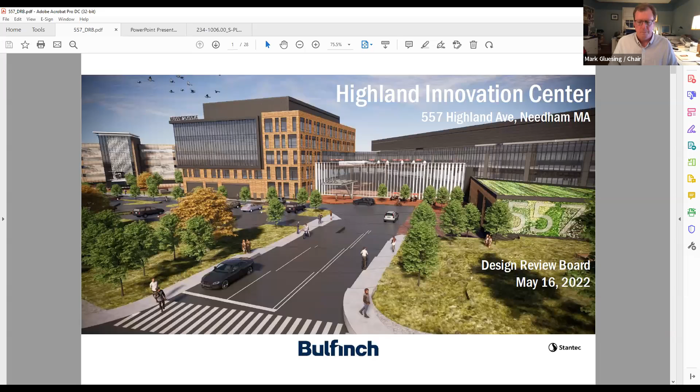Can everybody see the screen okay? Yes. Thank you, Mr. Chairman, members of the Design Review Board. My name is Robert Schlager, I'm the president of the Bulfinch Companies, the owner developer of the property. We're here this evening to present our proposal to you.

Some of you may have seen it previously in various neighborhood group meetings, both public and private. Please feel free to visit our website, 557highland.com. There's also some FAQs, frequently asked questions, and we'd be happy to go through any one question with you if you have specific concerns.

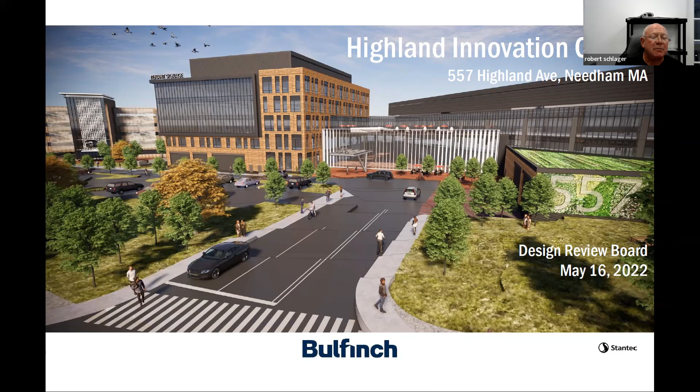With us this evening is our landscape architect, Paul Finger and Associates. He and Eric Joseph will describe for you the landscape features of the site. Our architectural team, headed by Principal Eric Weyant, Kristen Weigel, and Tom Ertz, will go through the architecture of the site. We're very pleased and proud to present this to the town of Needham.

The project itself is really an award-winning project in our view, and it's something that our company, which has been in existence since 1936, will probably place in the top 3 of its most interesting developments, both architecturally and design-wise. The project team together, collectively, has nearly 1,000 years of experience.

Stantec, the former ADD Inc., designed the office building at 160 Gould Street, as well as our headquarters building at 250 First Avenue, also in Needham. VHB, traffic consultants, SGH, structural engineers, and local counselors Bob Smart, Tim Sullivan, and Charles LeRae. Next slide, please.

So, overview of the site as it exists today. I think everybody's been by it probably 100 times, so I'm not going to waste time refreshing everyone's memory. I just want to point out that the Channel 5 site, in the lower right-hand corner, is not owned or operated by us. That has nothing to do with our project; it's owned and operated by Channel 5, also known as Hearst Media Publications.

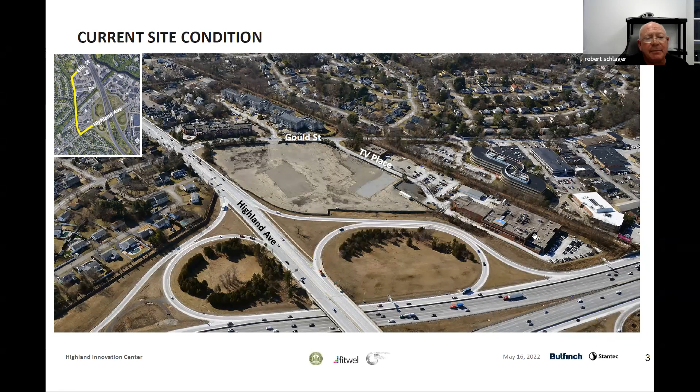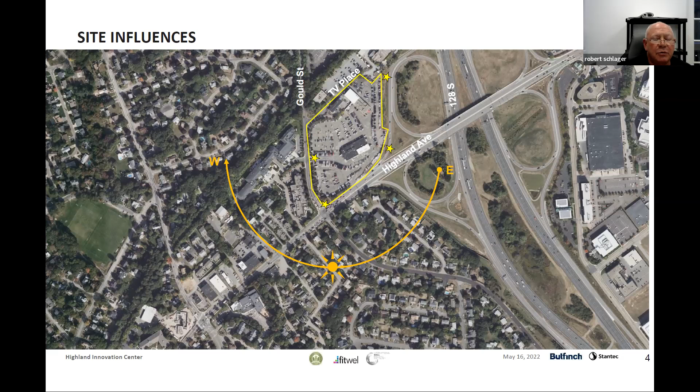Hi everyone, my name is Eric Weyant, design principal at Stantec.

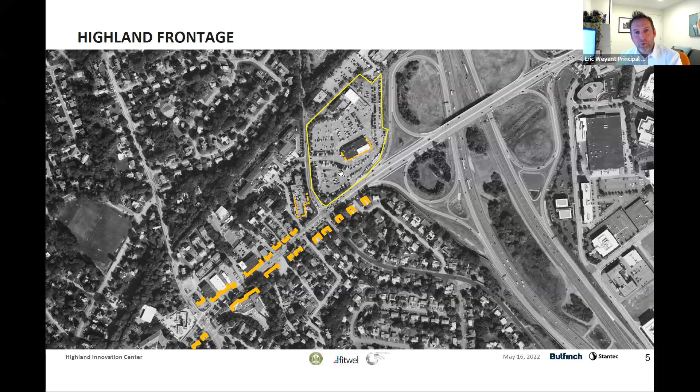There's a number of influences that have shaped our approach to this project. Obviously the site influences slide previously that you saw on the orientation of the sun, movement around the site. We also looked very closely at the frontages along Highland and how the current Muzi lot is really not contributing in any real meaningful way to the public realm. So that was something important to us as we began the project.

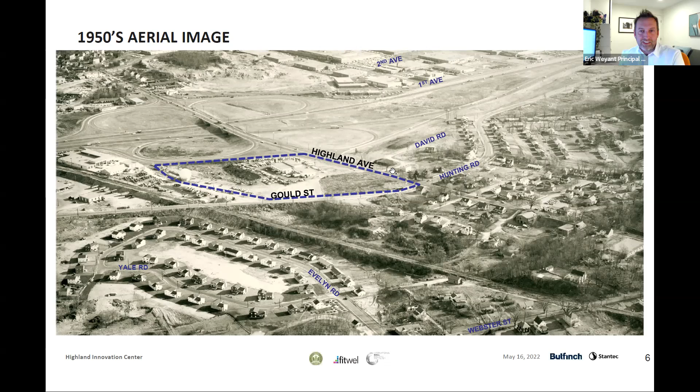We also looked back at some historical photos to understand the evolution of the site. When Muzi moved to the site, it was kind of an internal building with all of the cars located around the perimeter. As Robert mentioned before, their primary access point was actually off of Highland Ave and then through Gould Street. There was no opportunity to do anything at the corner. So we really looked back at this history and think there's a great opportunity to improve the site's condition.

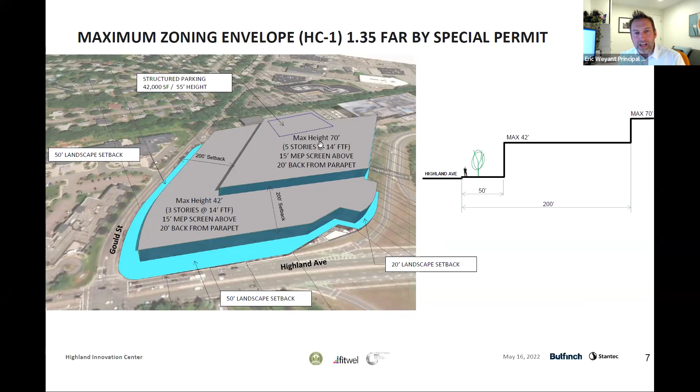The 50-foot landscape buffer coupled with a 42-foot high street wall is a very comfortable, kind of one-to-one relationship to walk alongside. So I think this will be pretty reasonable to work within. The structured garage was also dictated to be within this 70-foot height zone, although its height was capped at 55 feet, and it also had a maximum floor plate of 42,000 square feet.

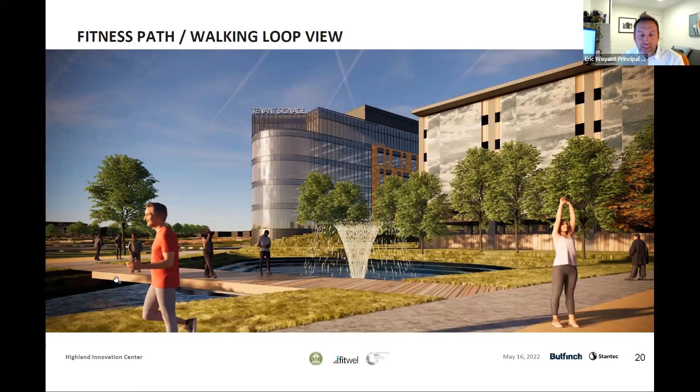This is one more eye-level view on the fitness trail, looking back at the building and seeing the structured parking off to the right in the foreground.

You can see the idea for these banners, at least at their locations. We'll still refine what is actually on them, looking at Needham influences and trying to tie it to the neighborhood and the town.

One thing I should mention: we got very excited doing these renderings, and everywhere it says tenant signage, this should not be viewed as part of this proposal. We'll come back with a full tenant signage proposal. We didn't fully account for maximum size and locations, and I know parapet signs like this aren't allowed, so we'll revise the signage when we come back.

We also just finished a physical model this weekend, so I wanted to include a couple of these slides. I know this wasn't part of the preview set I sent to the town last week, but again, just to see the project in context.

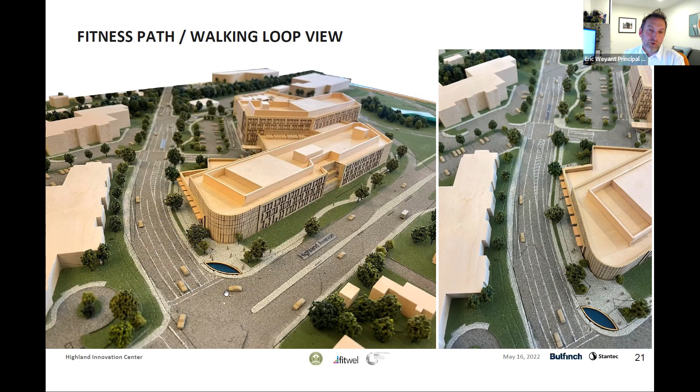I know it's not part of the architectural design, but there are a number of really impactful traffic upgrades to Gould Street—bike lanes, road widening, and additional turn lanes—that we think will really improve and enhance this edge of Gould as you make your way to Highland.

One more view in context, floating over Wingate and then over the detention pond with the banners again. That curved glass corner repeats on the 128 side as an opposite motif to what happens at the Highland and Gould corner, which steps back at level 4 so that level 5 can have an outdoor roof deck for the tenant at that location.

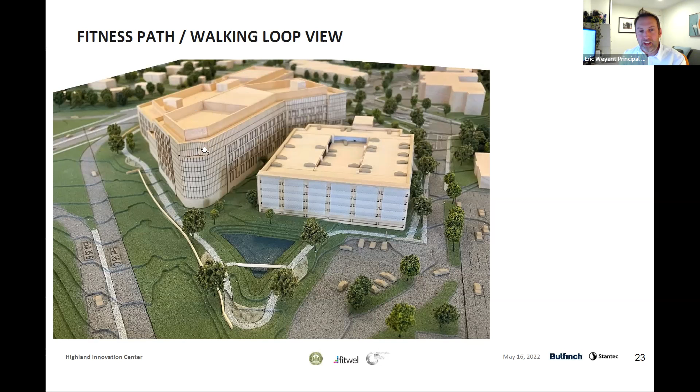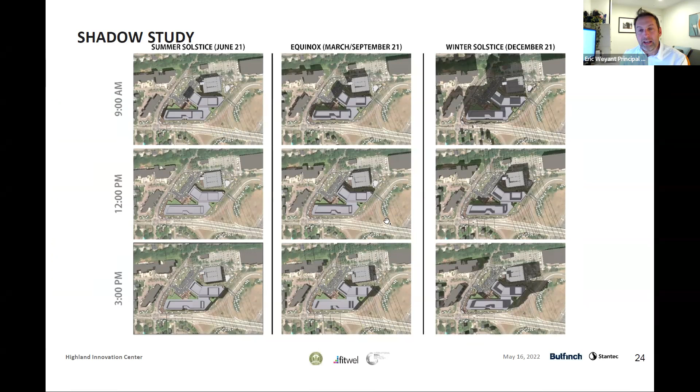On shadow impact, we don't need to go into great detail, mainly because there's almost zero impact to any surrounding properties. Any shadow falls primarily on our own property or our own buildings.

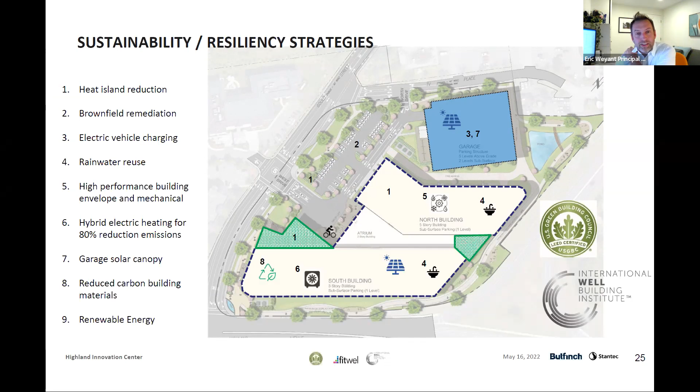On sustainability—again not necessarily part of the visual components we're reviewing tonight—we have a very elaborate and extensive approach to both sustainability and wellness, with a number of fantastic features that will make the building perform well architecturally and also benefit tenant occupancy, like healthy eating, opening up stairways to promote exercise, bike storage, and more. We're also proceeding with a LEED Gold approach and are currently on pace for that.

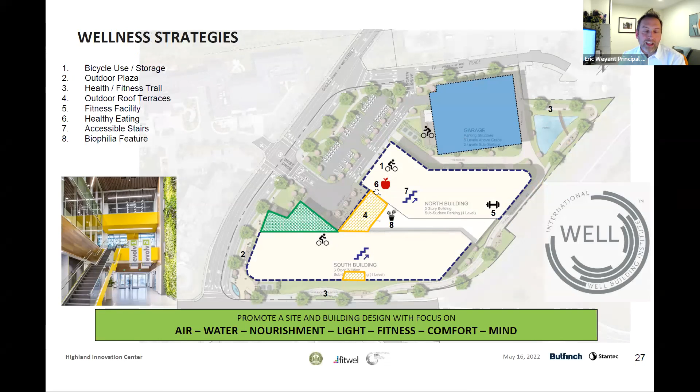These are some of the wellness attributes: biophilia within the interior atrium space and green walls. Lots of really cool features we're proud of and think the town will be proud of as well.

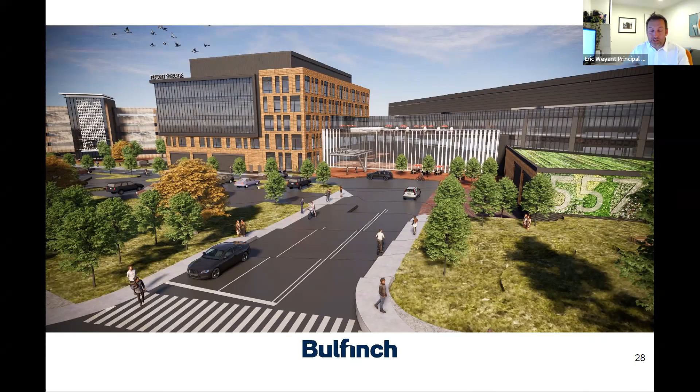Eric reviewed most of what we were going to go over, but let me elaborate on a few items. This is a unique site—Muzi, as you're all well aware, was paved from end to end, basically void of any vegetation. Usually as a landscape architect you look at existing conditions and see how to enhance them, but in this case we're starting from a blank canvas and working from that basis.

What we really started to look at are four or five activity areas we're going to concentrate on. As Eric described, one is more of the commercial retail area, where we're anticipating hardscape with pavers, tables, and an area for gathering, dining, and sitting.

And it's not only for tenant-driven purposes, but really for the community also. On the corner, the only historic element was the little fountain, which, as Eric mentioned, was the koi pond. So to look back at what Muzi had in that area, we're going to replicate that in some form of fountain, maybe something with a waterfall aspect, with a plaza behind it.

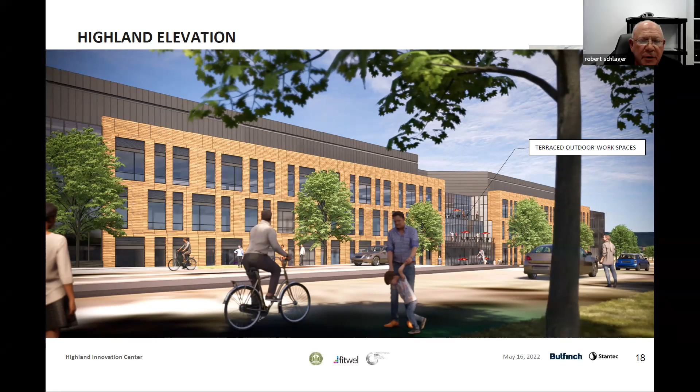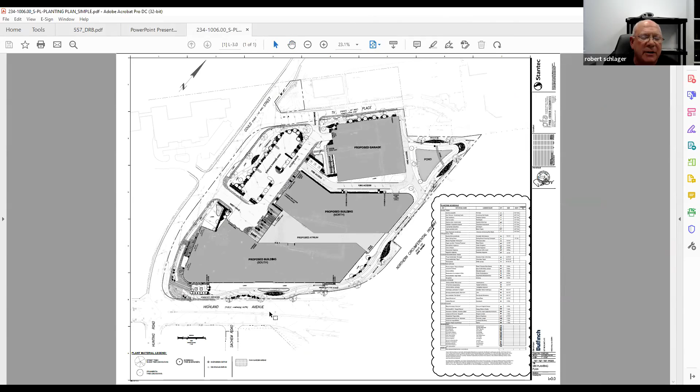Yes. So Eric, can you go to the vertical elevation of Highland? I also have Paul's landscape plan, that sketch up. Can you put that up, Eric? Can we go back to the aerial perspective, it'll just be easier. Oh, you just had it. Okay, we can use the black and white. Can we zoom in a little bit so Mark can see the trees?

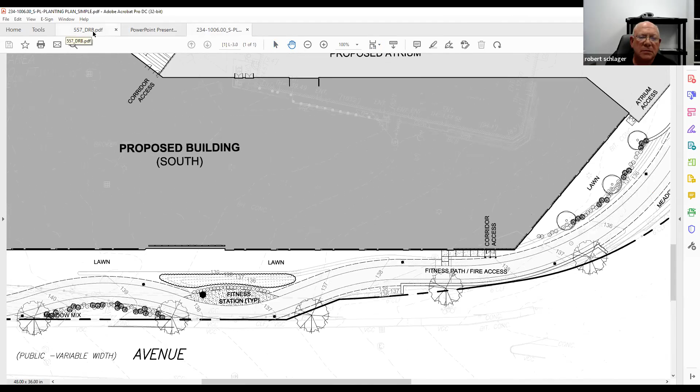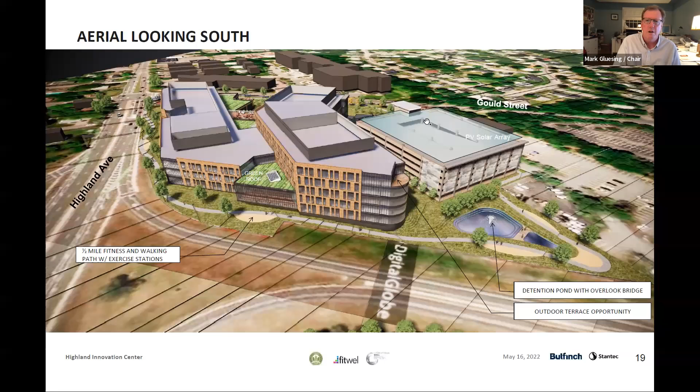Okay, I think what we'll go through tonight is just the general layout, but that's when the meadow mix and more determination of where those kinds of things are happening comes in. Maybe we'd like to have you come back for a quick review of the final ultimate landscaping and the issues there. Tonight we'll talk about the general site layout, the amenities Paul talked through, and the general orientation, and see if there are any comments from the board. Then on the detail side, when you've decided which trees are going where, we can go through it with you at another time, if that would be okay with you. That's fine.

For example, one comment made was that we obviously want the walkway surface to meet the requirements of the fire department, the police department, and sustainability issues to comply with our LEED certification. We would want that to be pervious material. Some people suggested a dirt path to make it more nature oriented. Others suggested a gravel path. From our perspective, we're happy to do a stone dust path that has the capability and capacity to withstand the weight of an H20 loaded fire truck, which the fire department has asked for. So we're really looking for input from all groups, including the design review board, as to what you folks might like to see as being more consistent with your expectations.

Similarly, on some of the trees, we've spoken with the tree warden, met with him a couple of times for the town, and he suggested alternating species along the street curb line, so that if there's a disease similar to what there was with Dutch elms 20 years ago, or other types of species issues like gypsy moth, we'd have that protection. However, some of the neighborhood groups have suggested a more consistent species would be to their liking. So we are... Sounds like you have your hands full getting through them. We do, we do. But the good news is that it's limited so far, at least, to two issues: landscape selections and traffic.

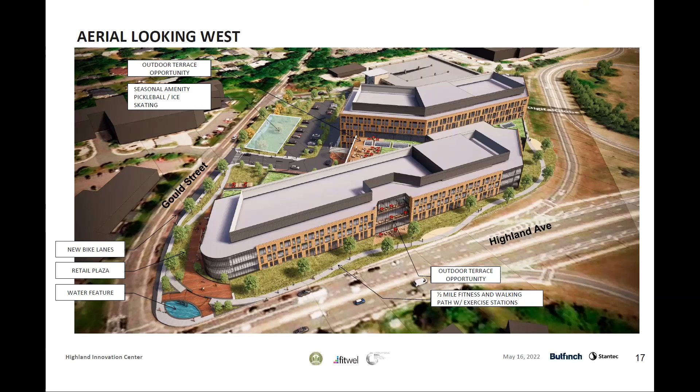Natives, I'm hoping you guys use natives in your landscaping plan. Yep. I think that's all. I thought the project was really exciting, and I really enjoyed looking at it, so I appreciate all the effort you guys have put into it.

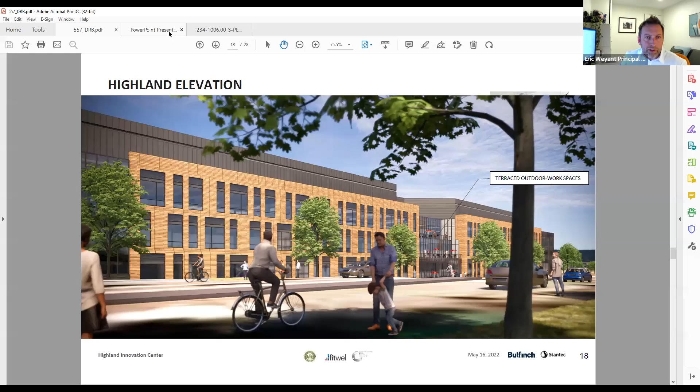Thank you. Eric, could you switch over to the slide on the plant species and blow that up for the DRB to see the selections we've got to date? There you go, go to the far right of that plan. Oh, the other side, there you go. Perfect, can we zoom in a little bit? Paul, do you want to run through, or Eric, whoever's most versatile, just run through the species?

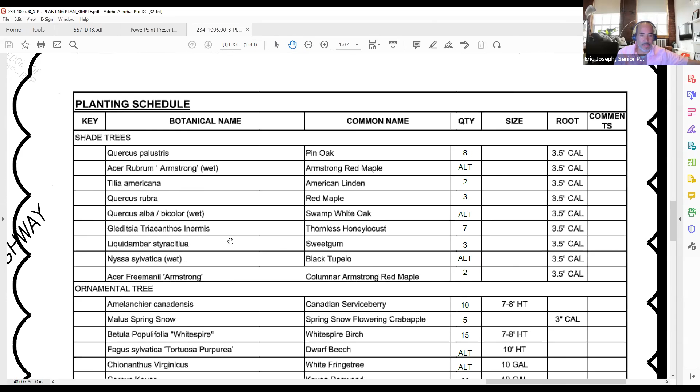Sure. So we have a variety of different plant groups - shade trees, ornamental trees, evergreen, and deciduous shrubs. For shade trees, we have pin oaks, which in talking with Mr. Olson from the town, he happened to like. We're also looking at lindens, oaks, and honey locust.

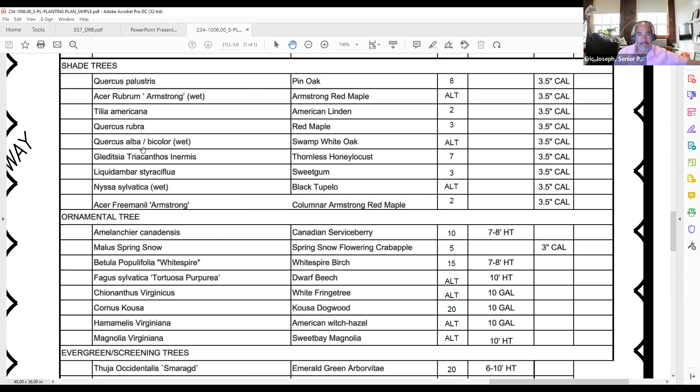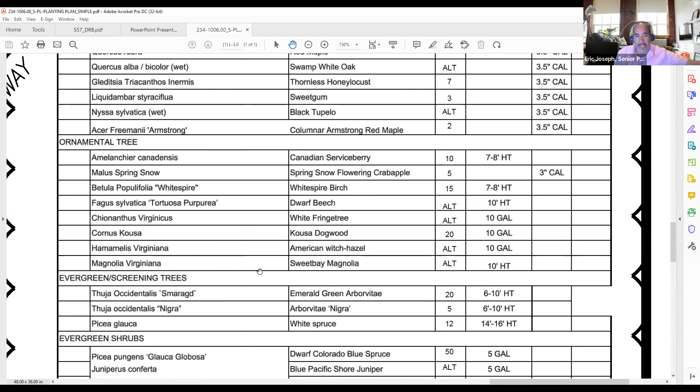For the ornamental trees, you mentioned wanting something a little more native, so we're looking at service berries. We also have some more ornamentals in terms of dogwoods and sweet bay magnolias. So it's a variety of different types of ornamental trees, both native as well as more ornamental.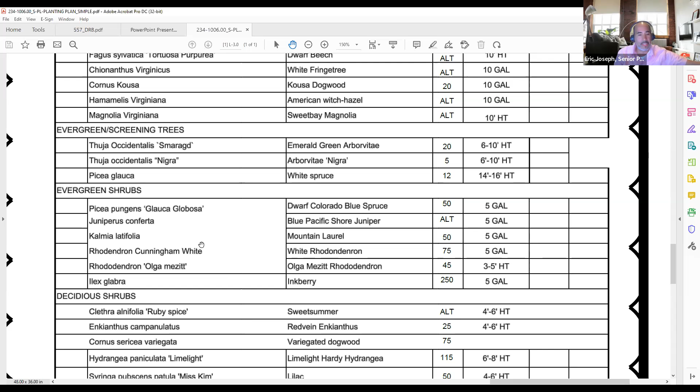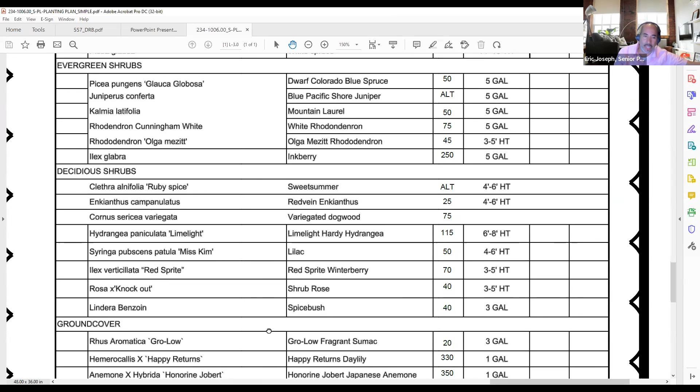Some screening trees, we're looking at tall spruces and arborvitaes, just for some screening and site elements. For shrubs, we're looking at rhododendrons, inkberries, junipers, even some dwarf Colorado blue spruce. For the deciduous shrubs, we've got a variety here - sweet summer, Enkianthus, variegated dogwood, hydrangeas, lilacs, roses, spice bushes - a lot of things that attract wildlife, butterflies, and birds.

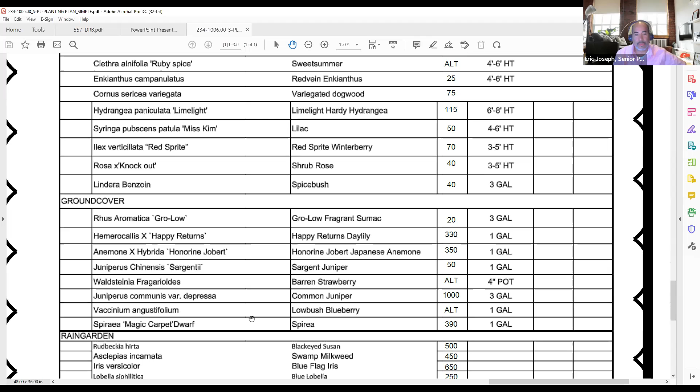Ground cover, we have sumac, daylilies - that's probably going to be one of our chief grasses. We do have some reed grasses we're investigating, some strawberries, low bush blueberry, some spirea. In terms of another plant community we're introducing to the site, we have rain gardens with black-eyed Susans, blue flag iris, broom sedge, cinnamon fern, and asters. We're getting into too much detail. So it's obviously a wide variety of different types of plant material.

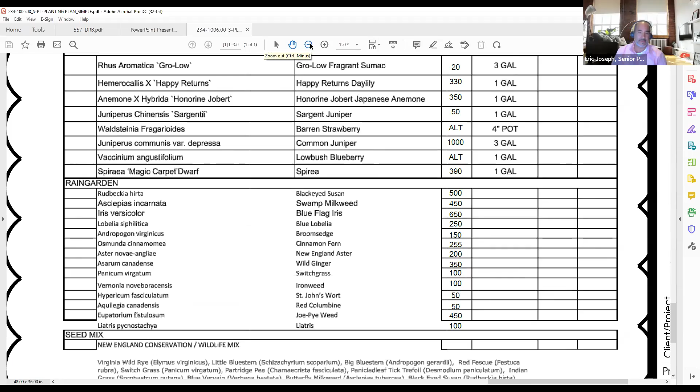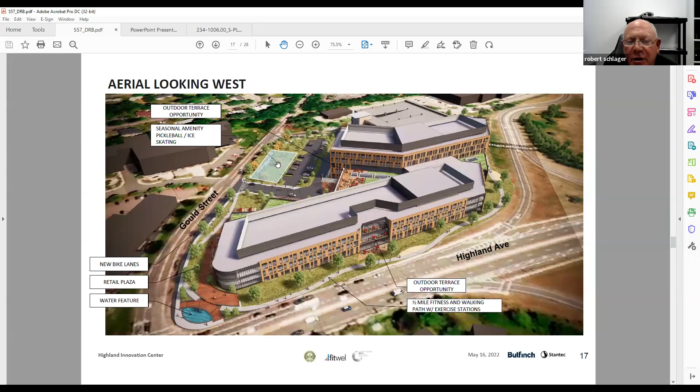One of the things we tried to do is structure it so there was spring, autumn, winter, summer flowering shrubs or colors that would be appealing and soothing, especially along the jogging trail. And Susan, that's a very good comment along Highland Avenue. We will incorporate some type of mid-height, 18 inches to 3 feet, shrub there. Just not sure what type would be best suited for that along the trail, or how we orient it. I don't think we want to go with material too high that would dwarf the trees, which will ultimately become very mature over the years. But that's a good suggestion to make people feel more protected.

The police department was sensitive to visibility, and that's why we kept it visible and open. The site is open to the public to walk or take advantage of the jogging trail or walking trail all hours of the night. There are 911 call boxes, and it is fully illuminated 24/7.

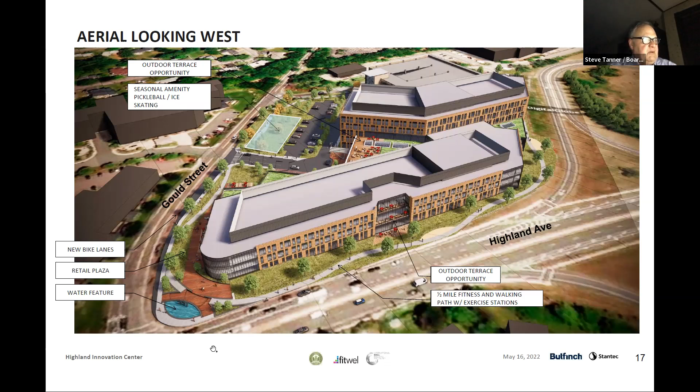Okay, thank you. Steve, do you have any questions or comments? Yes, I agree with Susan about the Highland Ave elevation, and I think that's a very good point. As far as anything else, I think this is a preliminary review, and I would need to see more details. One thing I'd like to see is an actual material sample of the building materials - like a palette of the screen wall, the charcoal gray screen, the concrete panel, or whatever it is, the exterior material palette. Yeah, no problem, happy to.

We can follow up with that. Should we send the box of samples to you, Elisa? Well, maybe you should send them to Mark, and I could meet with Mark. Yeah, we'll coordinate after the meeting, but it's likely that as you come back, this is our review for the planning board.

So this is our official review, not preliminary. So we would like to see that material sample. I don't think it's something we would disapprove of, but a better understanding would be helpful. If you're coming back for the landscaping, maybe we can coordinate the two together. I'll coordinate with Elisa, and we'll get samples in so we have them on file. We'll send them out tomorrow or Wednesday, have them delivered to Elisa, and she can pass them around to each member of the committee or people can stop by the office to look at them.

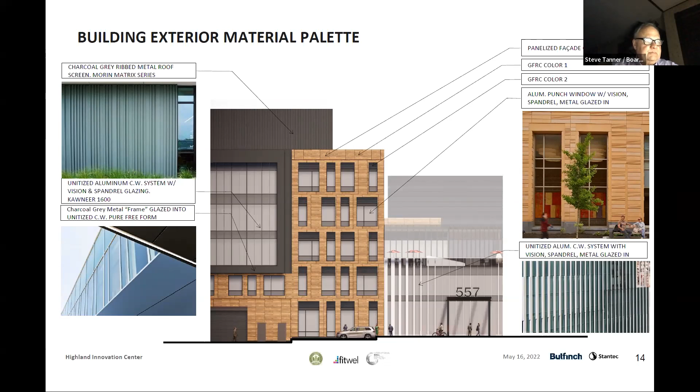Okay Steve, any other thoughts? No, that's it, thank you. Bob, I don't know what you're able to see from your car, but I got my laptop open. I'm good, I'm following along. Hi everybody, and a special hi to Eric and Kristen. Nice to see you. Likewise.

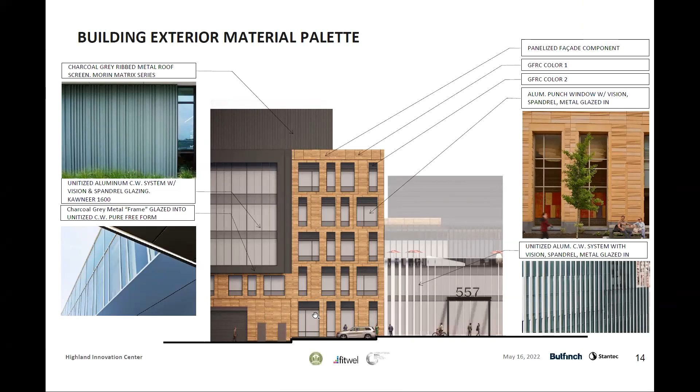Piggybacking on some of the landscaping comments, I'd love to see some grasses different than lawn grass. There may be opportunities based on how we think the different areas currently shown as green lawn surfaces. So maybe on Highland, between the walking path and the building, it might not be a popular gathering place, so maybe some different type of grasses there.

The illumination, is that part of this review? I heard the path would be illuminated, which is good, but it brings up a concern of how those look, and how illumination at night affects neighbors. Sure, so that's a question about what those light standards might look like. We actually have the lighting as well as photometrics. They're all dark sky, if that's your question. They do not have any off-spray light like the olden days. They're all LED downlights, and we can submit that with the package of samples, which we're happy to do.

Thank you. And also the illumination, I guess specifically more in the parking structure at the back, the north end of the lot. I've been on the board a while, and we've been through several projects in Needham Crossing, and there's a large garage there. When I drive south on Route 128 coming over the hill from Newton into Needham, I can see those lights from a long distance in the garage. I know there's a screen on the proposed garage here, but I'm curious about the extent of the screening on the garage.

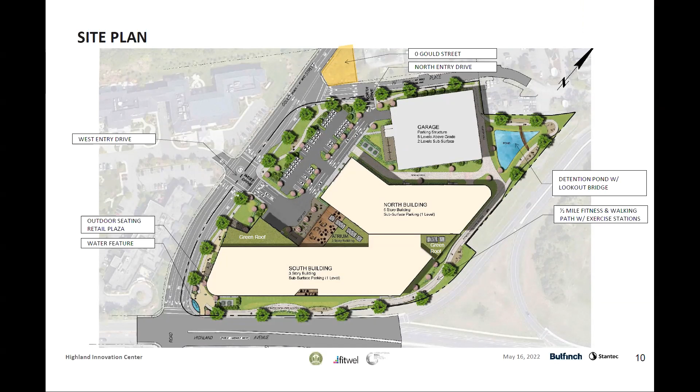Is there any potential for glare and reflection, those kinds of things? Good question. And then the screening on the roof, it's set back appropriately, but maybe consider a somewhat lighter color than rendered here, just because as you look up, you typically look up to a sky that might be in your view, and the sky tends to be a lot lighter. Agreed. And it seems to be rendered a little darker than the stone, the GFRC on the facade so far. And lastly, thank you to all on the team, a very thorough presentation. Thank you, that's it, Mark.

Thanks, okay. I guess, well, my comments would be a couple of things.

When you're talking about knitting front to back through that atrium space, that's all indoor, correct? That's an indoor atrium. Is it a single story? Double story, 2-story, okay.

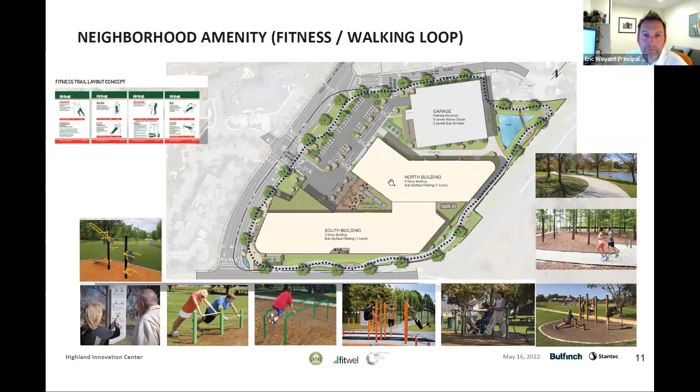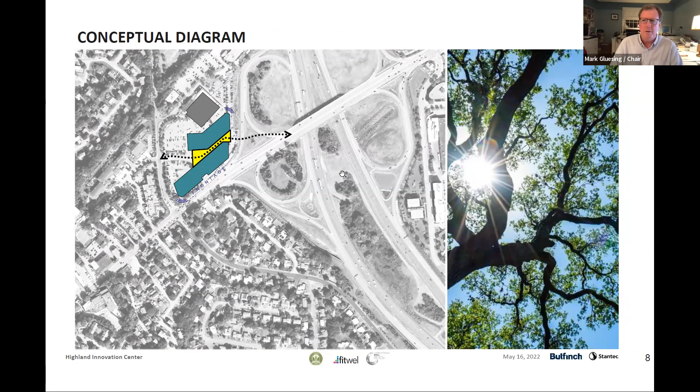So I understand the GFRC material that you're using. Have you finalized the choices on any sort of textures or colors, or is it approximately rendered the way it's going to be? It's rendered in an approximate way, I would call this the basis of design. Typically when we work with a precast or GFRC manufacturer, we will continue to refine, try different sandblasting - like oh that looks a little too heavy, that's a little too light - and fine tune the detail as we make our way through DD and CDs.

I thought the site works well. Again, you're hearing the same comment - we'd rather see a little more variety in the planting schemes, even in the larger lawn areas. However you might do that. I know this is early and you're negotiating a lot of other things, so we'll leave you to develop that as you see fit. But our comment is clearly that we don't expect to see just a bunch of mowing lawns. It doesn't seem to meet the sustainability issues that you've been talking about.

So we hope you, as you develop that, can take that into consideration. I do like the outdoor seating area. My concern when that zoning went into effect was that there was a big setback on Gould Street, and while there was a lot of discussion of pedestrian activity and access, it wasn't really street friendly - it was, you know, the 50 feet. So I'm pleased to see you developing that as something different than just landscape space, that it can be an amenity.

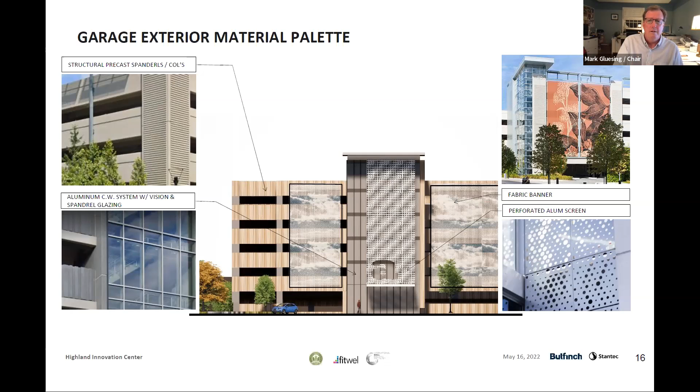I'd also like to see a little more of it, especially on the Gould Street side, where there's a fair amount of panel left exposed as concrete - just the corner, and then that far side. That's going to be quite visible to locals traveling on Gould Street. Maybe focus up on the front and the corner as it turns, similar to what was done on 128 - pretty extensively done, rounding the corner. I just don't want it to look like we hung banners on top of a concrete block - there should be another layer of intentional thought to it. Good comment.

So that would be my comments at this time. Chad Riley was able to join us late - I don't know how much he saw, but he has the package. Did you have anything you wanted to add?

You're muted, Chad. Apologies for everybody that wasn't able to join promptly. I think I echo the comments I've heard from my colleagues.

On the outdoor seating area, it's a pretty heavily trafficked, idling area, so having some kind of decent screening from the cars would make it a more pleasant area. I'm not sure exactly how the traffic works or if it was addressed, but I wonder if that one intersection closer to the Highland Ave intersection is going to create some backup if cars are coming out there as well.

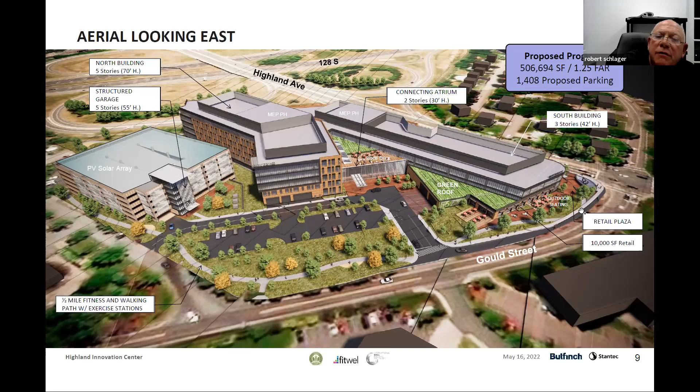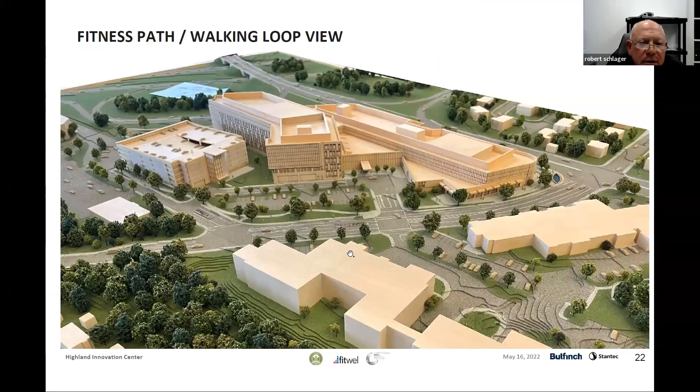If it hasn't been studied, it might be worth looking at whether that might be an entrance only. Can you flick to the traffic plan, the model that shows the plan? Just so that Chad can see it. It just seems like if everybody's trying to go in and out right at that first intersection, it could cause a lot of backup.

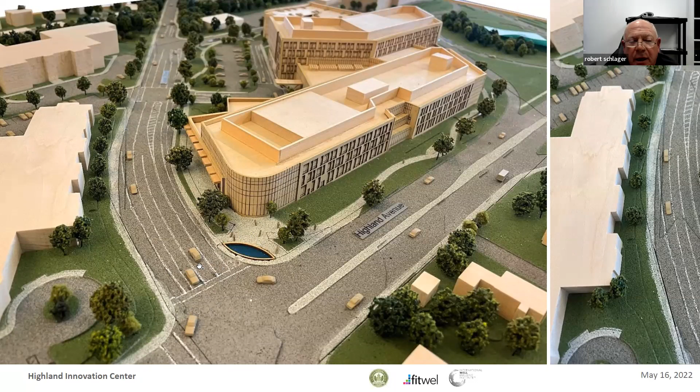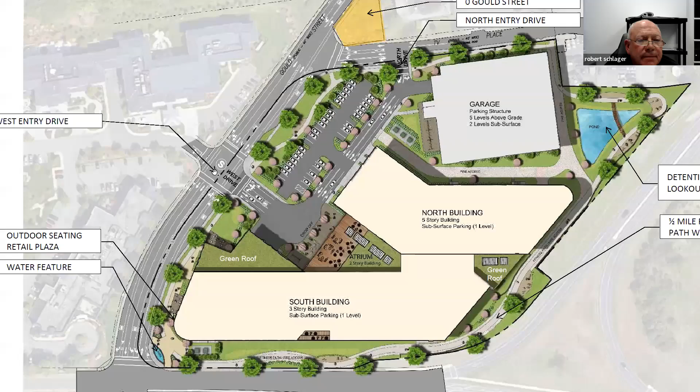There's a left only, a through lane, and a right only - or might be a through and a right, then two through-and-rights and one dedicated left. And then bike lanes as well on either side. I'm more thinking about if cars are trying to come out of that, and I guess there'll be a traffic light there. Go to the next model image, which shows the signalization. Right there - yep, the new West Drive will be a new traffic light intersection with the Wingate property.

I'm sure it's been modeled, it's just - I don't know. Just when I was looking at it, I wondered if the whole thing might be one-way traffic, but I'm sure you modeled it.

Just going back to the overall site and picking up on some of the things Mark was talking about with the garage - that backside of the garage, on towards the north, is going to be very apparent from the highway. Although that's obviously a different scale than looking at it from the neighborhood, it's going to be very apparent. So some real thought is needed to the image that's projecting out as people are approaching in the southbound direction.

But overall, it seemed like a decent composition to me architecturally. There was a lot of thought. The south building is a pretty long facade, but it's just basically traffic along there.

Picking up again on the garage, one of the things we've run into a lot is the way the lighting works, especially looking up into the upper floors, that there be some light control. Maybe it's not as much a concern from the highway, but with the residential area across the street, making sure people aren't looking up into glaring lights, I don't know if it's 24/7 or late into the night. But some shielding of the lighting and some consideration of that would be worthwhile.

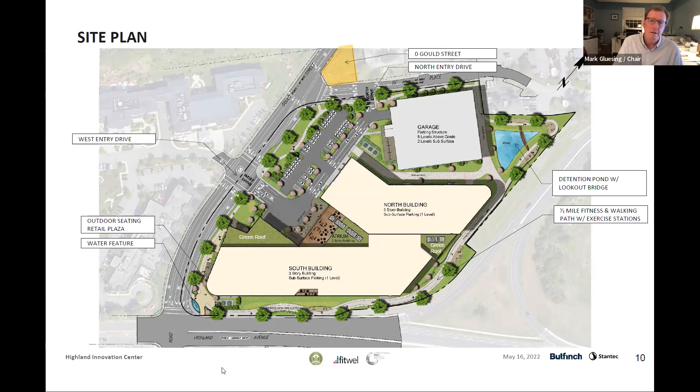So thank you for the presentation, and thanks for the building. I think it'll be a nice addition.

Thank you. Would you like to meet prior to our planning board hearing on June 7th, or would you want to wait until after that hearing and then come back to us? Our memo will say we're going to look at it in more detail, and there are a lot of issues you'll be covering with them. So if you want to try and accomplish it before June 7th, I don't think we meet again. If you want to wait till the next meeting, make sure you have time to get through your coordination with the neighborhood, and maybe you can even get some planning board input based on our comments, then come back after that. So the timing's up to you, we'll do whatever you want, but I don't feel the need for you to rush back before you see them.

Mark, on these larger complexes, signage, from wayfinding and directional signage right up to tenant signage on the building, can often be a pretty lengthy process to get through. I did notice a couple instances where it looked like some tenant signage might be put up on top of the building, but with the size of some of these buildings that could be multi-tenant, one sign on top of the building isn't necessarily going to cover everybody who wants street presence. So ongoing consideration on where and how signage is located and controlled on the building, and also within the entire site, how the branding and wayfinding all works, is something we will want to look at in more detail.